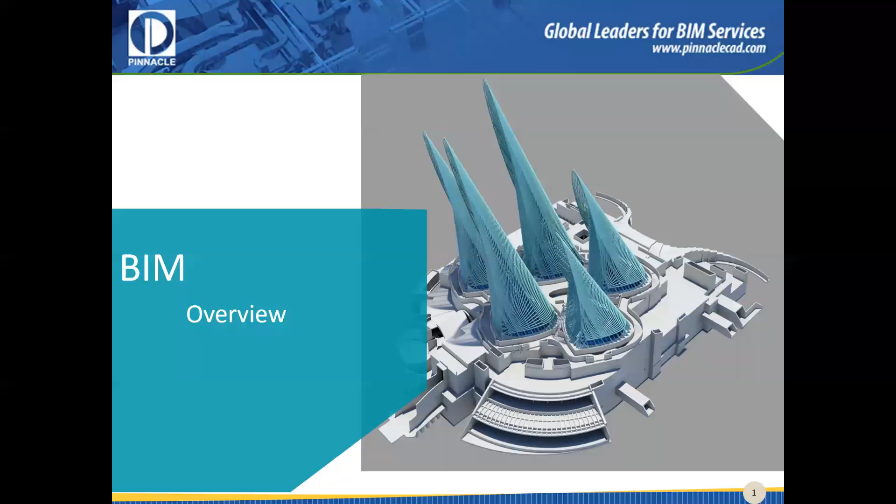So how BIM came to be was that it is basically an example of IT integration into the field of construction industry. What we're doing here is, you could say, we make a building twice through BIM. Once it gets done in a computer, and a second time it gets done in the real physical world.

I will allow them to work on one single dashboard, and everybody can see the progress of what the other guys are doing. At the same time, the mechanical guys can see what the electrical guys are doing. If the mechanical guys have issues with how the electrical guys are laying out their services, or if their plans could impact the mechanical guys, or the civil engineers have issues with the mechanical trades, then this information can be passed on to the concerned party within the right amount of time.

So the right amount of information gets passed on to the right person, in the right amount of time. What this brings to us is sufficient time for action. Now, these problems that these guys will encounter when they're working on a dashboard together, right now the construction on site hasn't started. They're just working on one common dashboard, you could say like they're working on one computer.

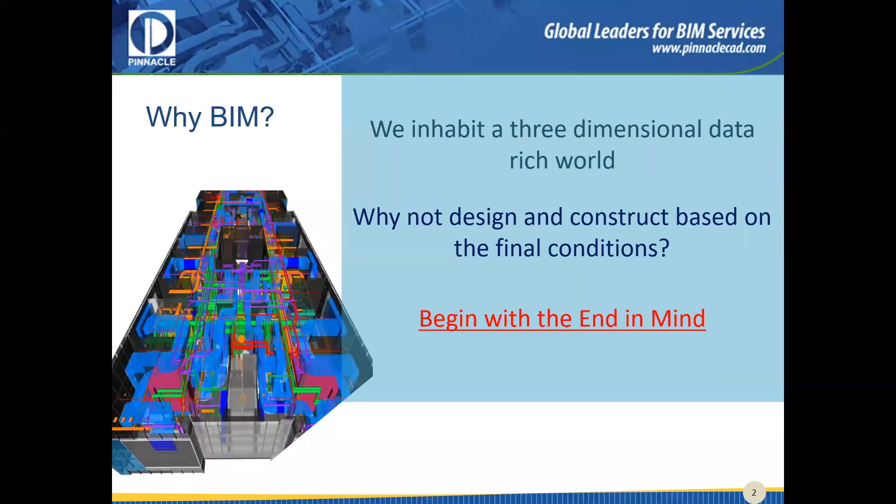We'd also be saving up on time and the quality of the job, since we'll be doing it in fewer iterations. We won't have so much rework, because a lot of people are involved in this, meaning collaboration and coordination. Since more people will be involved in this team, we won't have to rework so many times, or have those discussions so many times where I have to change my own work multiple times just to accommodate your needs. This way, we'll be saving up a lot of time.

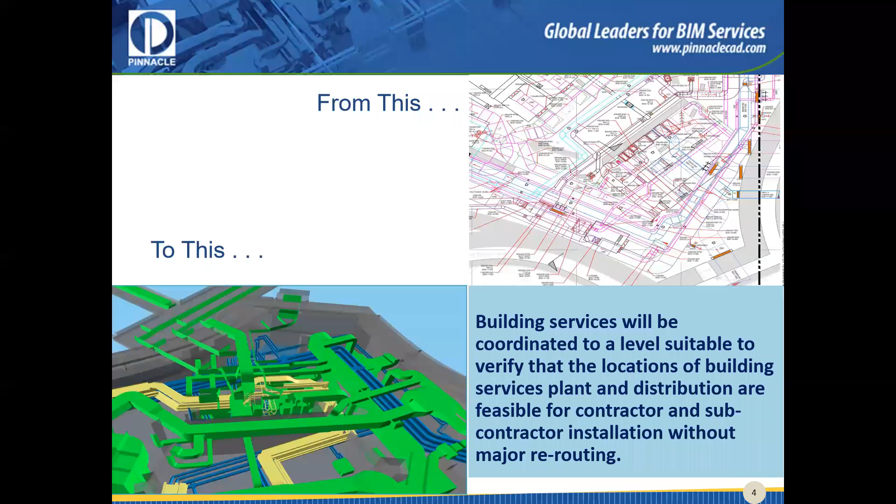BIM is a socio-technical system that comprises three elements: people, process, and technology. This could be, just like we have for a manufacturing plant, any policy or process incorporated has to do with either man, machine, material, or method. These four things are basically governing all the principles we follow in how we manufacture, and it's always revolving around these four elements.

Similarly, for BIM, it's the people for whom this whole tool has been created. It's the process, a set of protocols, a set of standardized instructions that everybody agrees upon and follows together to achieve their common goal. And the third is technology. The technology is the enabler here; it's what is enabling the people to achieve their goals.

When they all work in amalgamation, when they all work together, that is how you achieve success, how you achieve your goal of having a building constructed and delivered to the facility management teams, and to the owner, in the least amount of time, in the most cost-effective manner, and in a way that the owner will find really easy to run through their maintenance process and so on.

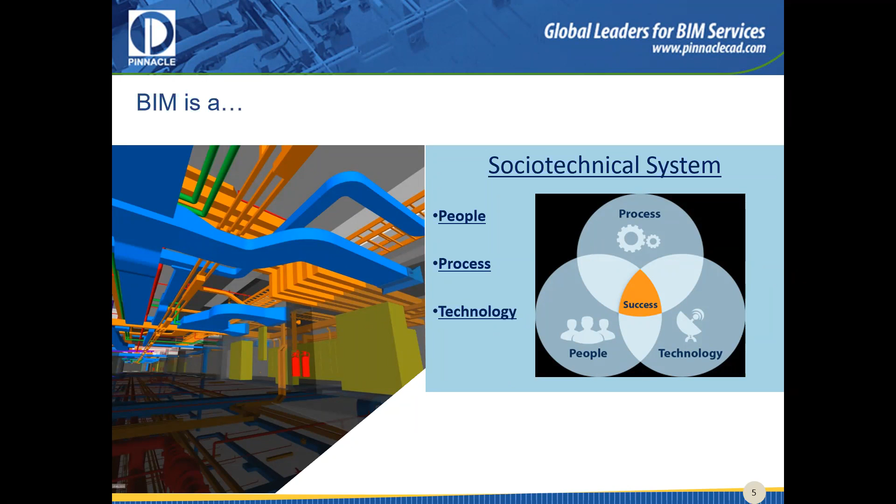We'll be having engineers who can directly communicate with the firefighting team. We'll be having the firefighting team who can communicate with the steel guys. They can communicate with the architect. The MEP trade can communicate with the facade or the engineers. And these teams can communicate amongst each other. So conflicts can be resolved easily, and they won't be able to develop to such an intense level that it would take a lot of time or money on site to resolve them.

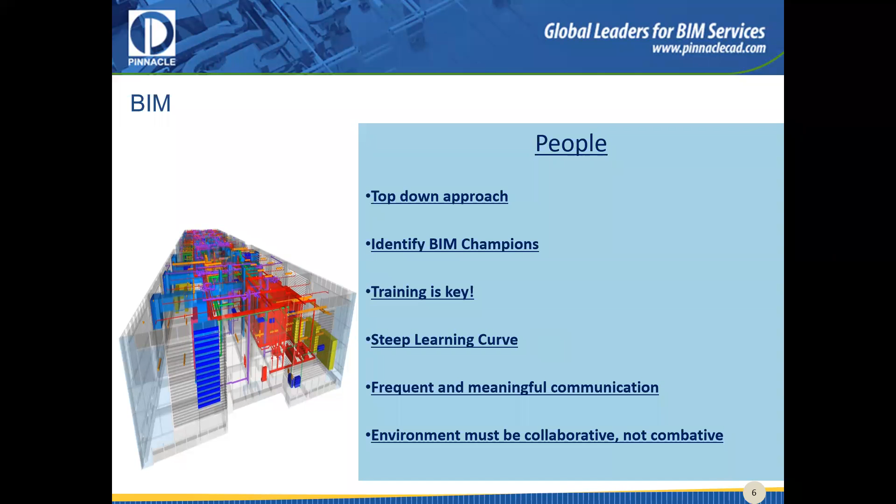Then we have the process. The process will be a general set of protocols, standards, and instructions that have been standardized, or agreed upon by the entire stakeholders team. These processes have been developed keeping in mind what is easy for the whole stakeholders team to achieve their targets and objectives of having an easy installation, an economic one, and a time-saving one, while also keeping in mind the owner's requirements. So around all these objectives, we stitch up a process that we need to follow for the BIM execution.

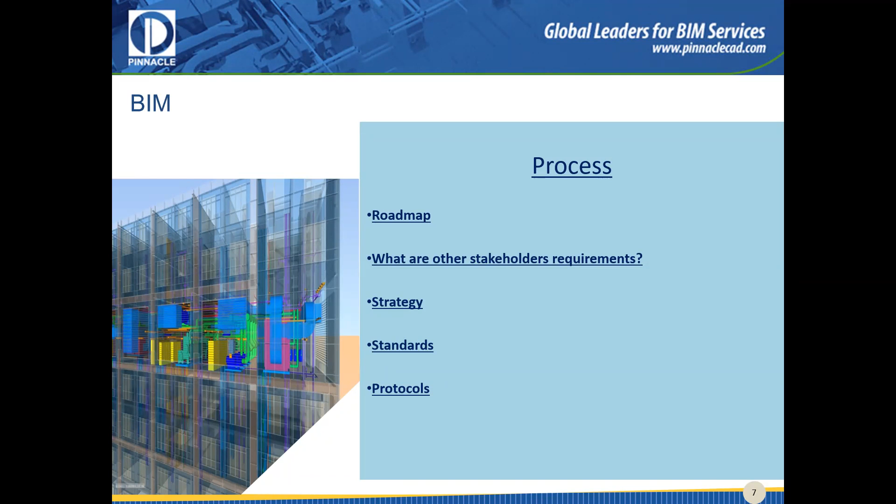Then comes the technology. The technology is the enabler here. It just covers parts like, we have to achieve a certain objective set by the client, and what kind of facilities need to be provided to the people aspect so that they can work upon the client's needs and have the objectives met.

That can be a need of hardware. You'd be having workstations, powerful systems that can cater to the software's needs. The software would be as per the requirements of the client, and what kind of software we're looking to use would be a decision taken up by the execution team.

Then we'd have the specific project requirements of the client, if a client wants something done in a certain way, and what kind of facilitators can adapt to that particular way the client is asking us to follow. For example, if the client asks for absolutely real world data from the very beginning itself, I'd be taking up a software that can offer that. Or if the client just wants a basic representation of things,

I'm just doing a feasibility check, I'm not really constructing my building, I just want to know how much it could cost - then I would be using a slightly different software. So softwares would vary as per the client's requirements, and so would the hardware eventually, if you're using a different kind of software.

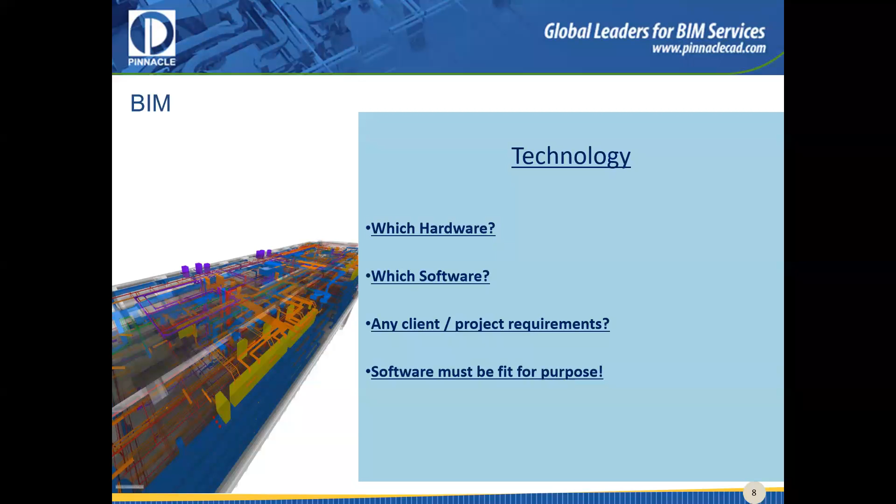of the grass that's already been painted, or of the birds that have already been drawn into the canvas. Now, as a painter, his hands are tied. He just has the palette in his one hand, and he can't really change the color of every single element that's already been drawn in.

Now, if I bring in this perspective, that BIM is a database - for example, if this painter has the option to just tap on that particular color and select a different color, the entire grass would change, and all the colors of the birds, their feathers would change, or the color of the sky would change right on. Just by changing the color of a small element, the whole change gets reflected in the painting.

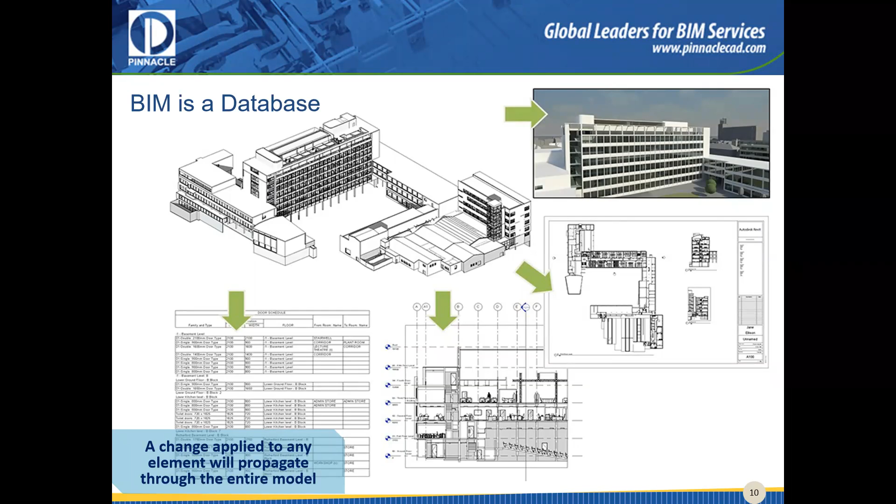One difference between a BIM software and a line-based one is that we had AutoCAD in second or third year, where we were just drafting on the basis of a certain drawing given to us in college. We would prepare a column, or a three-dimensional cube that would basically be a set of lines. And that's what it actually remains - just a set of lines in AutoCAD or a typical CAD software.

But in a BIM software, you model it in a three-dimensional space, and it remains as an object. It doesn't stay as a group of lines. So with that object, you can associate certain information.

For example, let's say through solid modeling I have modeled an air conditioning unit. Now if that had been done in AutoCAD, it would just remain as an air conditioning unit, and you would only get the visual sense of it. You would not be getting any inherent information that can be linked to that particular model.

So through BIM, what I can do is model this air conditioning unit and type in those specific details - the manufacturer, the price, the servicing cost, the servicing duration, and any other required parameters - and associate that information with the object. So now I have an object that I can place in a simulated model in any number of places, and all these parameters can be fed in.

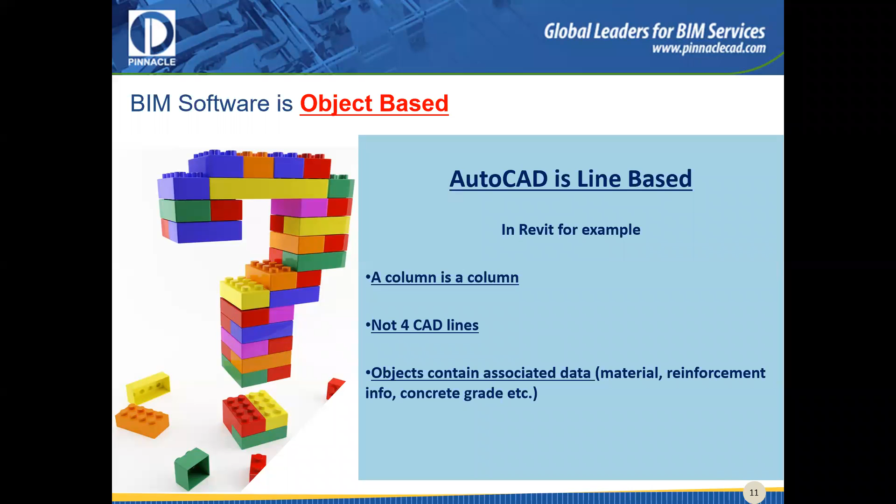So he wouldn't have to run through any paperwork, he wouldn't have to run through the drawings, he wouldn't have to run through any cost estimate sheets to figure out how much that air conditioner had cost him, or if he wants it repaired. So it'll be very easy for him to manage the whole facility management process using BIM. He just has to open one model and click around certain elements to get their information - much more time saving and cost saving for him.

Now, another thing that BIM enables is work sharing. So if you go back to this slide, what we have here are the stakeholders working together in a particular project, facilitated by the BIM technology. Now what we are doing here is we have multiple people working together, but on the same exact file.

They're working on the same environment. Everybody sees the same duct, everybody sees the same building, and any change that the engineer makes will directly be visible to the MEP guy, or any change the HVAC person makes will be visible to the firefighting person. So since we are all working together on one file, we don't have work split up with communication terminated among teams. The teams are working in one environment and they're working together.

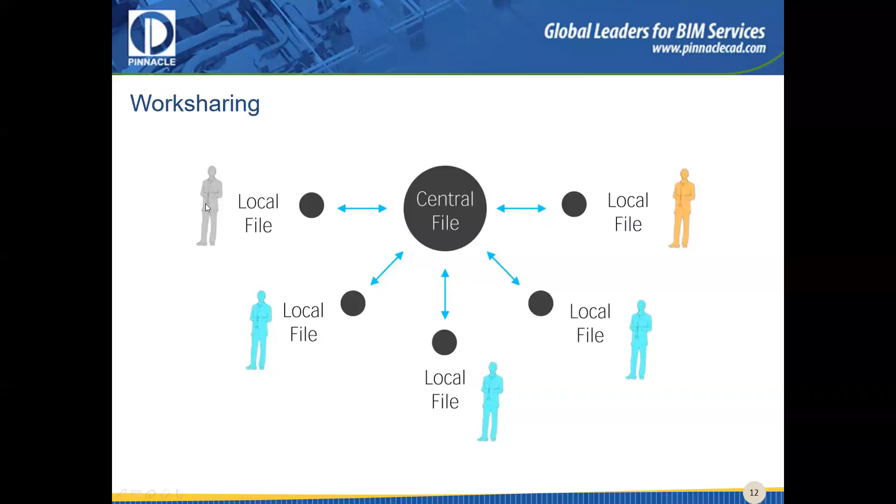This slide further stresses that we'll have a central file on which all parties work, with every party having a local file visible only to them. Each person makes changes to their local file, which are then reflected on the central file. These changes become visible to everyone else, and to the first person himself, as well as the rest of the team.

Now what BIM has done is offer a 3D simulation environment where you can have these services tested. Once you've tested your services and run through the simulation, you've removed any clashes and conflicts, and you can prepare those drawings again. Now those drawings are more reliable and more accurate. This has been possible through coordination, which was in turn possible because of the visualization and collaboration provided to us through BIM technology.

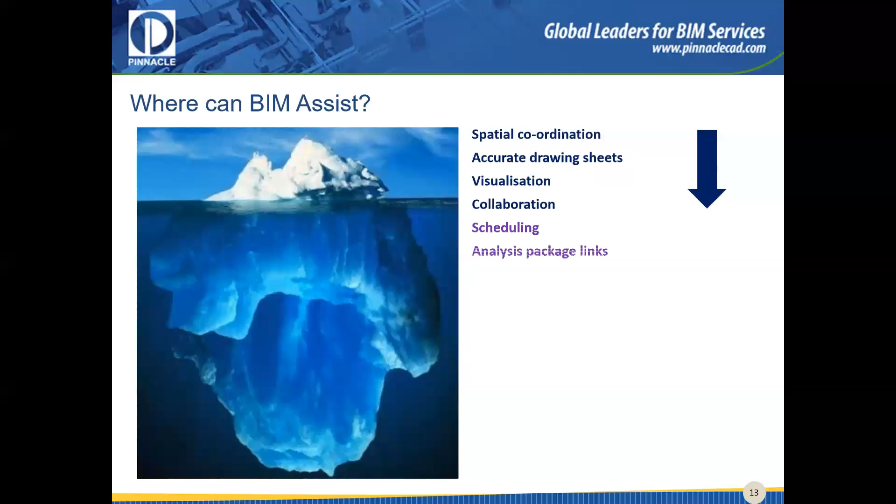So that's just the surface - that's just what we see on the surface here. If you go underwater for the iceberg, it doesn't just end there.

Now we have analysis work we can do. Let's say we've simulated all the ducts and pipes inside a building, and placed all the centrifugal pumps, checking how much discharge these pumps can offer. I can do some analysis, running a technical simulation to check whether the sizes of the pipes running across the building are good enough, or validated, to function well with the pump providing the discharge. Basically, everything is technically feasible and physically applicable here.

Likewise, I can check the flow rates, and the loss of head from running certain fittings in a certain manner. I can identify all these technical aspects which could eventually impact the people on site, have them tested, and make changes within the simulation world itself. I can have the sizes of the ducts and pipes tested and changed through the simulation process.

So what this simulation and analysis process offers is validation of the model - that the model has been created, it's economic, it's time saving, everything. But is it really achieving the objective of the building or the objective of the client? And is it doing that in the most cost effective, time saving manner? All this can be tested through analysis.

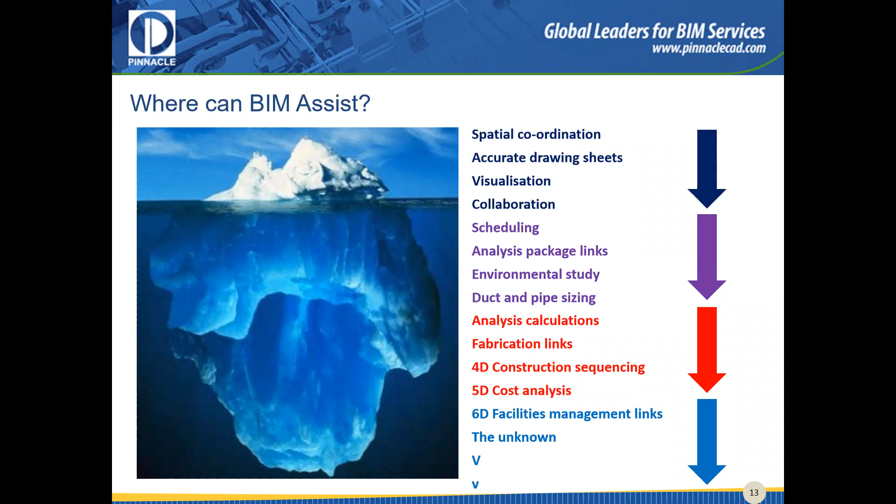So new frontiers are being shown up here as this technology is evolving with time. And these are just some of the aspects to the extent of which BIM has evolved to now.

Now, every execution plan, irrespective of if it's a BIM project execution plan, or if you're working on a fabrication project in the automotive industry or anything, you'd be having a goal, you'd be having the objective as to what you want to achieve. This objective is provided to us by the client, the end user, and it gets passed on to all the stakeholders who are concerned.

Likewise, you'd be having, okay, this is the objective. Who is authorized to work in this model? Who is going to be helping us out here? Who are going to be the stakeholders? And we'd be having information shared to us, like the project information, where this particular project is situated at, what's the site information, what the survey says, what is the sea level elevation, things like that, and who are the general contractors, who are all the concerned party members.

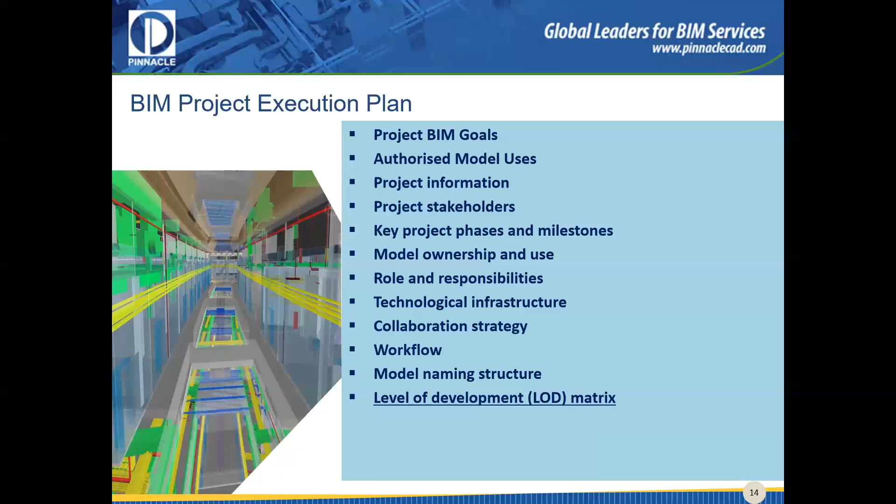So this is one aspect called modularization, something I'm working on right now. We're working on a hospital project in the United States, in Phoenix. What we're doing for the client is we have all these items created in a 3-dimensional model, and now real world data and real information has been fed into these models.

What's happening here is we have modeled all of this in the most cost-effective and time-saving manner, and the client has approved it all, and it's going to be installed exactly in this same fashion, same arrangement.

Now, how it used to be earlier was that all this material would be procured in bulk, brought to the site, and just laying there in bulk - possibly kept in a safe or unsafe manner, all this material lying around the construction site. You'd be buying a lot of bulk material but only using a certain amount at a time, because you wouldn't be installing all the pipes in one day. You'd be working on a particular zone on a particular day.

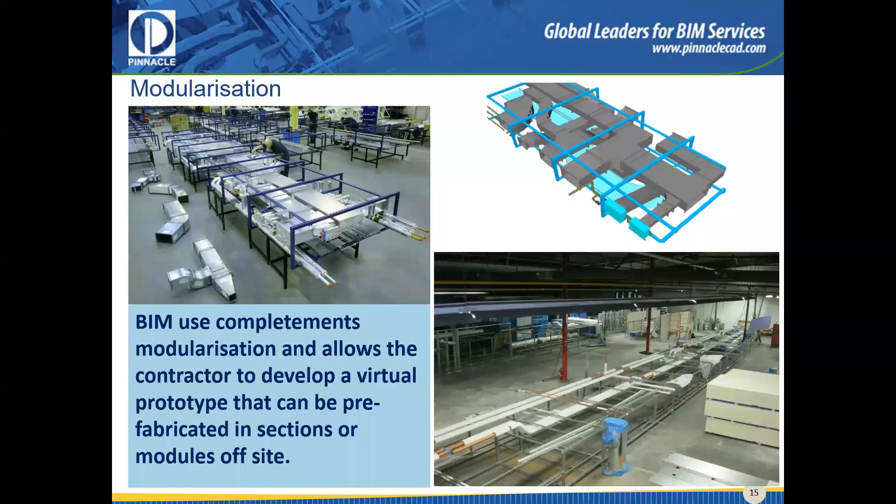This is one element of BIM, and it's really time-saving and a lot easier to assemble very complex areas. If you break the pipes and ducts apart and first install the ducts and then the pipes, it becomes difficult and time-consuming for the guys on site. But what if you set it up like a jigsaw piece and directly attach these things together on site, breaking large chunks of services and putting them together on site? That becomes easier to do.

Problems are identified early on in the virtual model and are not missed only to be discovered later on site. These things can be identified inside the model itself, in the simulation, and if they're not attended to there, they will definitely show up on site. Then you'll have people reworking that entire zone, which would really impact the time schedule, and rework would definitely cost you money.

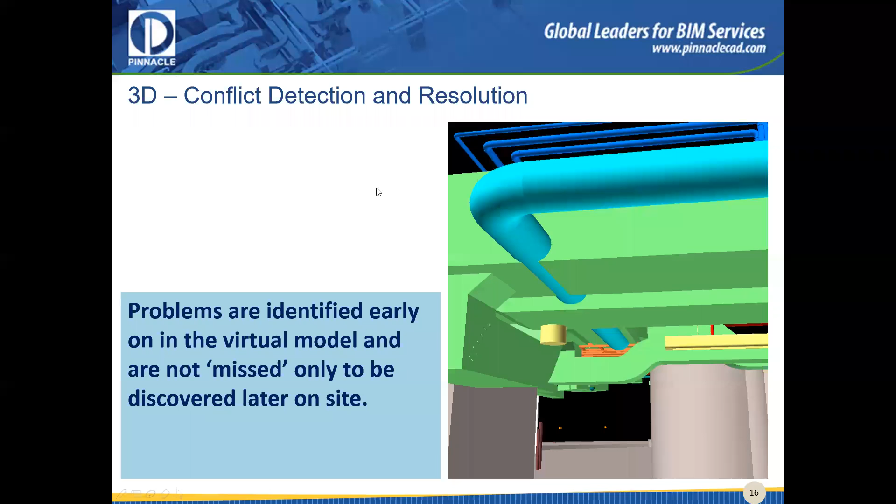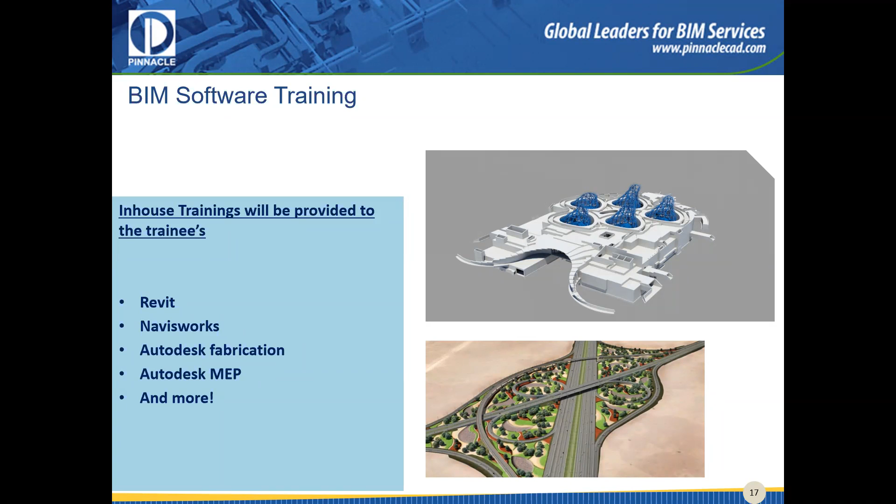The BIM softwares we usually use are Revit and Navisworks, then Autodesk Fabrication, and certain other add-ons from Autodesk like BIM 360. All these softwares enable us to work inside the simulated environment that other stakeholders have created or that we're working on. We have people working in the United States, people working in the Middle East, all together in one common environment. To get into that environment, we require certain softwares and enablers on our side as well, and that's possible through the softwares listed here.

So, summary of this presentation - mostly I'd say it's people, process, and technology. The whole concept, the procedures, the standards, all revolve around the people aspect. The technology exists to serve the people well, the processes exist to serve the customer well, and together these elements in collaboration work to achieve the common goal of the client.

As I said in the beginning, we build things twice, and models are a database - everything is built in a simulation, in the real world it's tested, real information is fed in, and exactly those things will be reflected on site. No conflicts would then occur among the site personnel, everything is done in a more standardized way, and it's done within the time schedule. We've minimized any chances of rework or areas where money could be overspent.

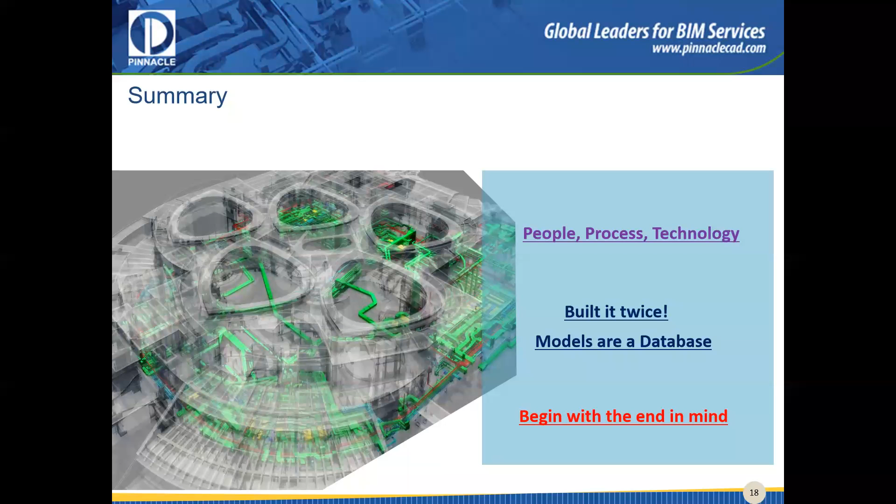Begin with the end in mind is what I'd say here - you must have a clear picture of what the customer eventually needs, and on the basis of that we put the information into our simulation model.

This is just one quote I'd like to end this presentation with - technology and people will always be hand in hand. Technology won't replace people, but people who use technology will probably replace people who do not. To work well in the changing world, you'll have to adapt yourself to the technology that runs the modern world. We'll have to pick up the skills that enable us to achieve today's targets, and the skills that make us more adaptable and agile when working on a project.

Meanwhile, Ashish sir has a question, so he's just putting up his question.

Meanwhile, I just wanted to know - since BIM is a software, what is the compatibility level for CSE students who wish to take this up? Is there any scope for other branches also taking up this thing?

We do have, as I said earlier, new frontiers coming up in the world of BIM, and we have virtual reality and augmented reality, which is now serving us in these objectives. Earlier it was just a computer where a guy would walk around the model, and now it's through AR and VR. You could have this whole model review done if you just put on a VR set, and you could literally walk inside a model which is scaled up to its right dimensions.